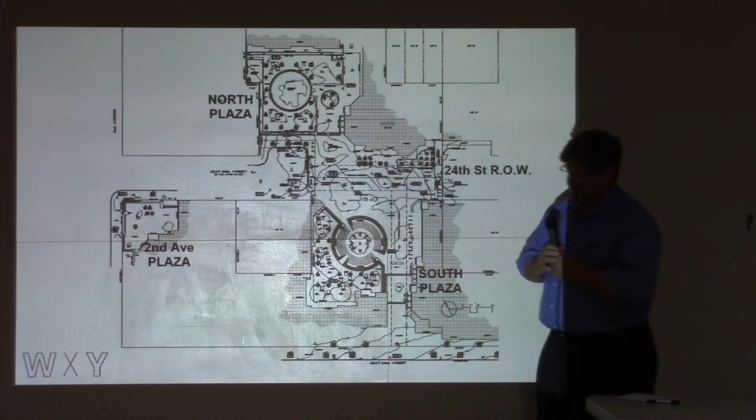Obviously at the corner of 24th and 2nd Avenue. Next slide.

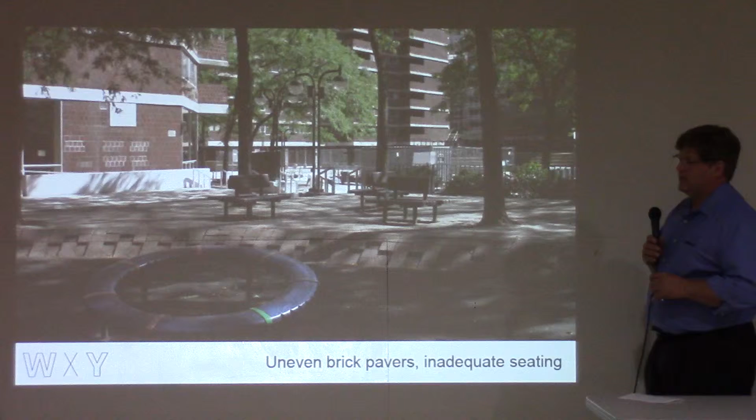In looking at the existing conditions as landscape and urban designers, we look for a bunch of cues as to what is working well and what is not working well. The trees in this North Plaza are doing quite well, especially compared to some of the other trees in the plaza, parts of the complex. So they became a primary feature that wanted to be preserved, enhanced, and developed.

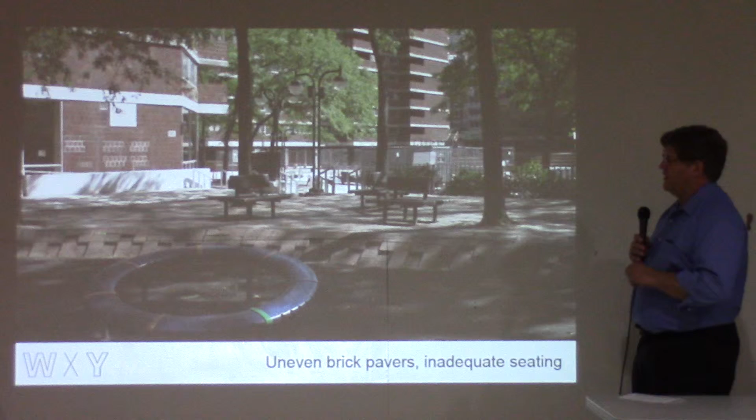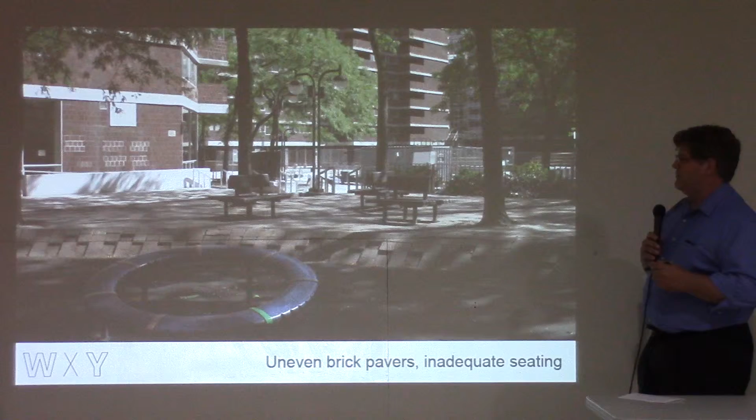But the pavement around these trees is in constant battle with the roots of the trees, creating problems for the trees, obviously, but also problems for residents as they try to make their way through the area without falling on an uneven surface. We also noted that the original benches that were placed in this area, and this was also mentioned in the surveys, are not oriented in a sort of friendly, collective way. They're just seats, but they face opposite each other. It's a sort of strange arrangement. So we wanted to work on that.

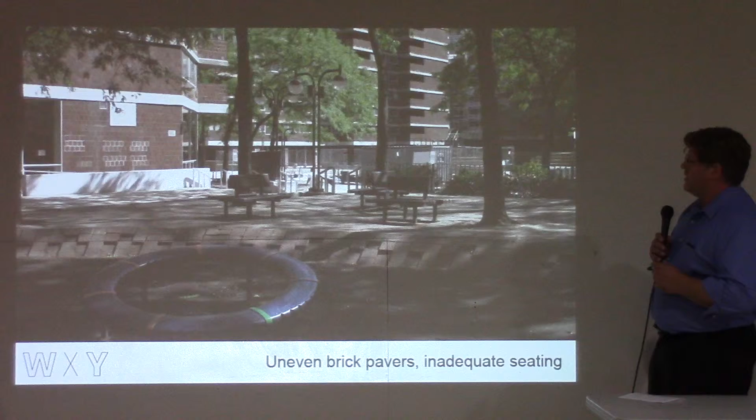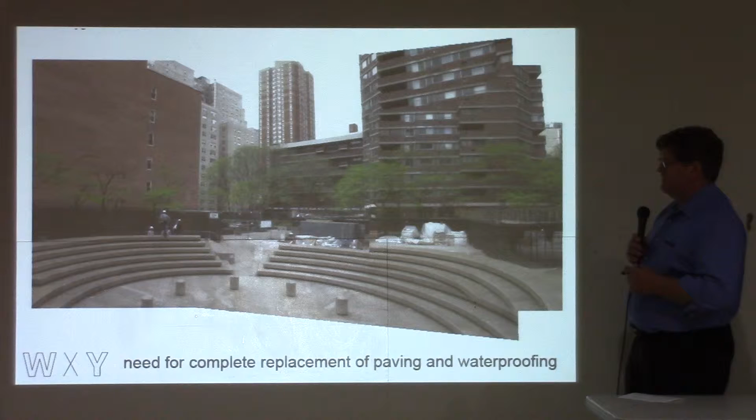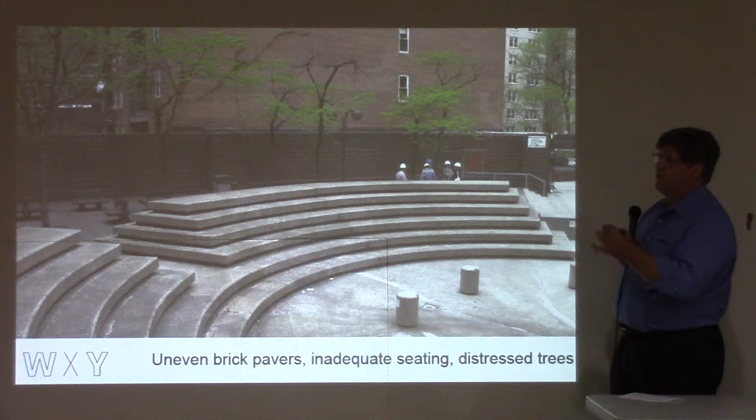The other issue with the South Plaza is the trees, which were planted at the same time as the trees in the North Plaza, and they're like bonsai trees by comparison. And they are not in good health. They need to be removed anyway in order to do the waterproofing portion of the project, because you have to get underneath them. But we took note of what the problem is with putting trees on top of the garage. It's essentially a roof, this plaza, so it's a green roof.

If you put green features on that, there's a lot more available in the marketplace now than there was in the 70s for green roof strategies with lightweight soil media and drainage layers that allow you to control the overflow of water when there's more water than the planter can handle. And there's also a lot more known about what's the right kind of plant to put on a roof structure.

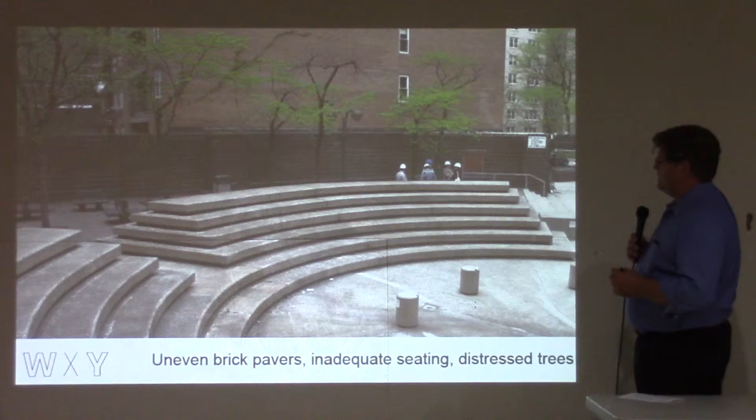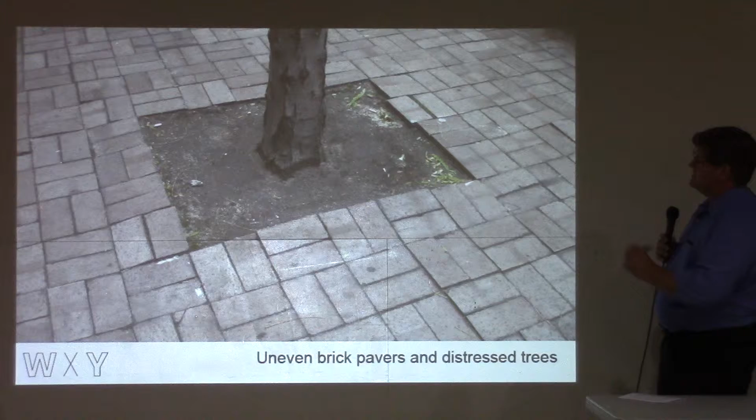So next slide, please. And this is just a close-up of the sort of ongoing battle between walking surface and tree. All of this unevenness here is created by the surface roots of the honey locust tree. This is just another slide demonstrating how dark and kind of foreboding this back area is, even during the daytime.

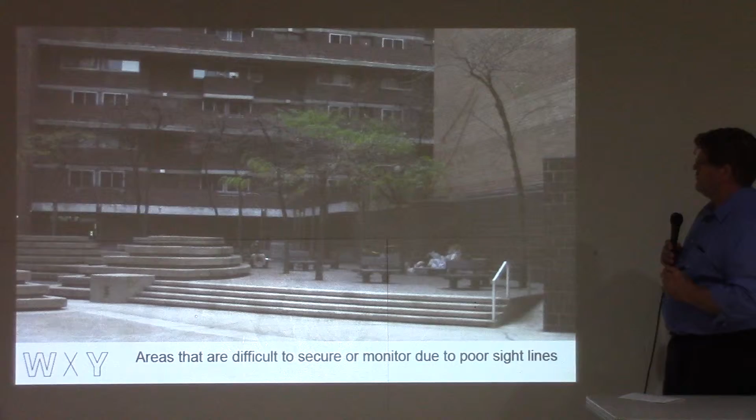Next. So out of this process of looking with our fresh eyes at what you all have been living with for years, and reading through the surveys, we came up with 12 goals of the redesign. And this is all pretty straightforward stuff, but it's good to state it, and we always are looking back at it and making sure that we're accomplishing what we set out.

So replace the paving to eliminate trip hazards, but also reduce paving and increase planted areas as appropriate. One really good way to handle stormwater now is to actually use some of the planted areas to collect stormwater, reducing the amount that you contribute to the combined sewers.

3, provide a new landscaping treatment for all plazas with plants carefully selected for areas of full sun to partial shade as required by each location. Right now, you basically have trees and a few shrubs and whatever people plant on an annual basis. Our goal is to come up with a landscape that is year-round and survives through all the seasons. Doesn't require replanting each year. Next slide.

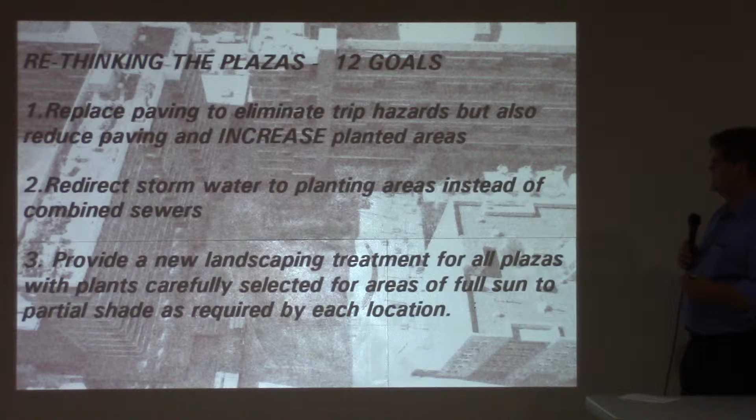Create, as I mentioned before, landscape areas that are compatible with the garage roof waterproofing. 5, create a garden that continually changes in appearance with seasons, so that there is an ongoing interest and variability in the visual display. 6, select plants known for their resistance to drought and disease, resulting in gardens that are easier to maintain without need for extensive and wasteful irrigation systems or fertilizers or pesticides. This is a big part of our design. Judith will talk more specifically about how you do that in a moment.

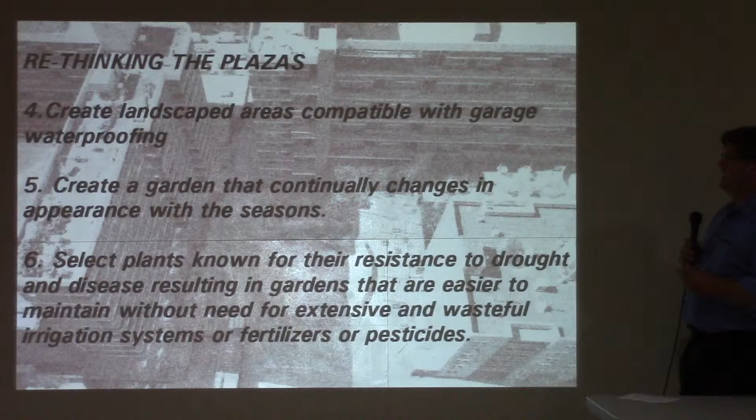Next, the gardens can also provide a positive habitat for beneficial fauna like butterflies and songbirds, providing nectar for butterflies, seeds for birds, so that it will become a living landscape, not just a display of plants.

Create landscapes that can have an educational impact and also be aesthetically enjoyable. The planting plans are being organized in such a way that we'll be able to identify what plants are planted in certain areas that create both an aesthetic effect, but also a way of understanding what you're looking at.

Nine, make all plazas universally accessible by installing fully current ADA compliant stairs and ramps, and all hardscape pavement will be cast in place concrete, no pavers, no more uneven surfaces caused by small unit pavement.

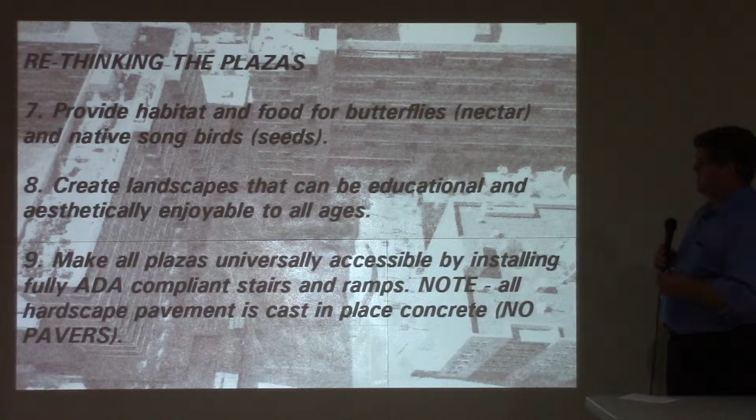A very important thing that was not our idea, it was a task assigned to us, is to specify all materials and fixtures with consideration to cost, value, durability, and ease of maintenance. I think we've accomplished that. Some of the samples are over here. We can talk about those later.

A very key feature of the new design is an attempt to improve security, eliminating those dark and hidden areas, creating more fenced-off areas that will provide greater control of access to areas at times as determined by the community. And the other opportunity, which we'll get into in a minute, was to expand the playground, provide additional equipment suitable for a wider range of ages, from toddler to 15 years old.

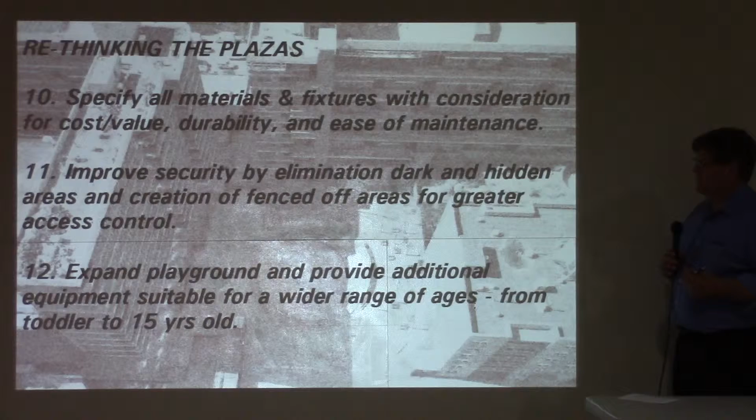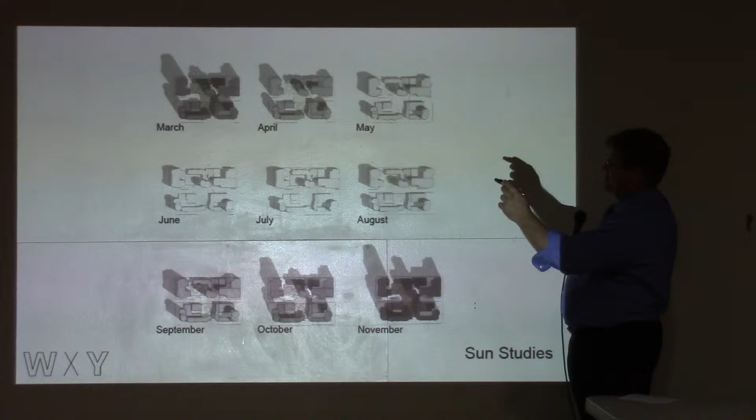So one other aspect of our study of the plaza was to do a sun angle study for the entire year. We ran animation, which actually was every day of the entire year. This is just a monthly summary of, I'm guessing it's around 10 o'clock in the morning or something like that, I can't remember. But in any case, this is a snapshot, like March 15th, 10 o'clock in the morning, April 15th, 10 o'clock in the morning, May, and so on.

And what we were trying to get out of this is, what are the differences between the plazas in terms of the amount of sunlight over the course of the whole year? This would affect our choice of plants, it affects our choice of programming, what goes where, what will be suitable in certain areas over others.

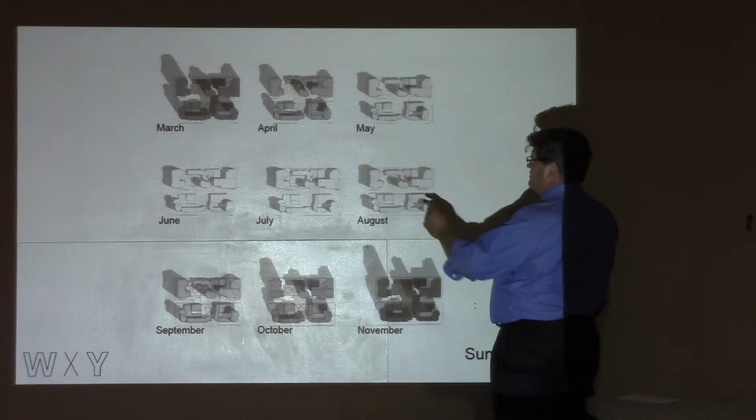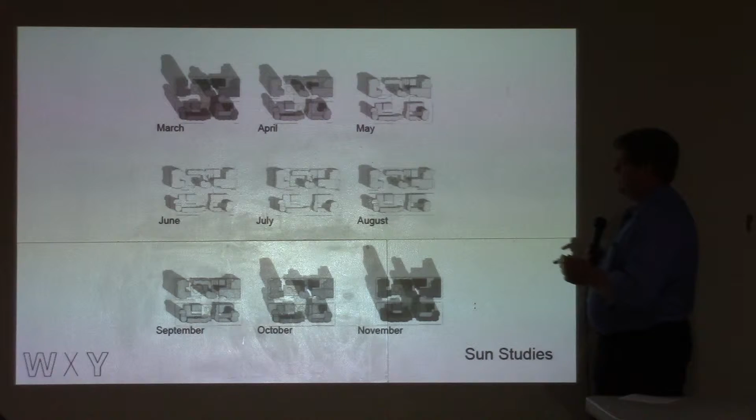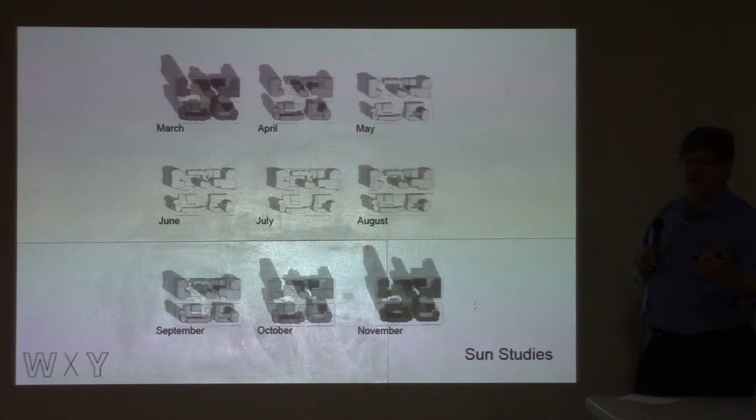What we found was that for much of the growing season, the North Plaza had full sun, and that's part of the reason why these trees have done well. The South Plaza is shaded from the south and the west by these tall buildings, and that is also probably contributing to the lack of growth of those trees over there. So they're not getting enough soil, enough water, or enough sun. And so this became an important first step for us to understand how we set up our rethinking of the plazas.

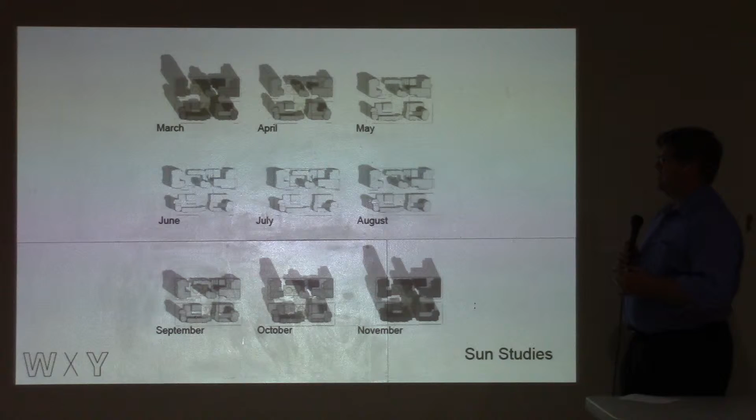So this is a plan of the new design, and the big decision that came out of the 12 goals and the sun studies and the plant health that has been observed, was that the right place to build a new garden for East Midtown Plaza was in the North Plaza for a couple of reasons. One, the sun. Two, it's on grade, it's on soil, it's not on a structure. And three, by making it a garden, we can remove probably about 75% of the pavement that is competing with the trees for air and water. So it's a win-win-win for those three aspects.

This is a honey locust tree, which has a very nice dappled sunlight effect, provides nice cooling shade, but it's not dark. And you've got a really great feature here in these existing trees. So we've done everything we can to ensure that they continue to do well.

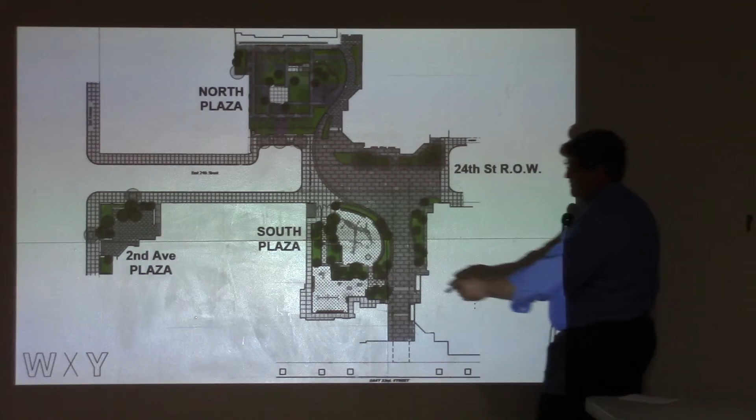In the South Plaza, there's the challenge of dealing with a landscape plan that's appropriate on top of that structure, both from a waterproofing standpoint, but also weight, and also dealing with the sun being cut off most of the afternoon by shading from these buildings. So we determined that the right place to have the playground was the South Plaza. We can talk more about that when we zoom in on it.

The Second Avenue Plaza has been slightly reconfigured to make it a more flexible space that can be somewhat more secure than what it is now. The corner stairs have been replaced with planters. Planters are being designed so that there is no seat wall along the public sidewalk side to discourage a lot of collection of people sitting in that area.

Right now, it's a bunch of walls and steps that are all conducive to people just sitting down and hanging out. What we're trying to do is to create a nice planted shady area that feels very much part of the East Midtown Plaza complex, not just the sidewalk leading into your property.

The 24th Street right-of-way: what we wanted to do with this area is create a continuation of the design concepts and the others, so we developed this curvilinear shape in the paving pattern that is reflected in the planters of both gardens. We feel like this ties across this street closure, which, while the street closure is a very, very important part of the development of the complex all along, it has always felt like a line drawn in the sand between the two sides. So we want to draw a line across that street and really make it evident that these go together.

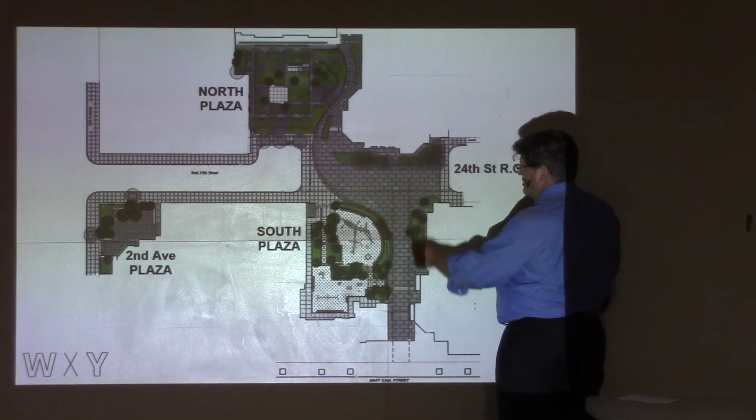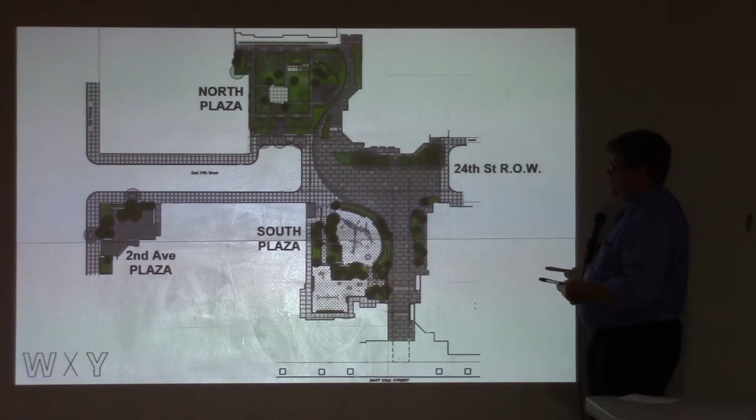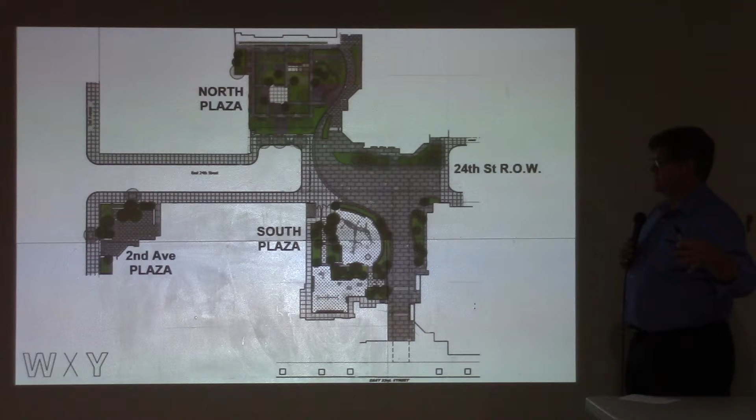The ramps, for the most part, in the existing changes in elevation are all being updated to current standards with handrails, and the slopes are all being confirmed for compliance. Within these plazas, there are some slight level changes. There's a new ramp being installed here to deal with this level change. In this area, which we'll see in a minute, there's two levels. It's not always apparent because most people probably don't go in the back. The back part is higher. That needs to be maintained because that's a structural change in elevation, and we're dealing with the ramps there.

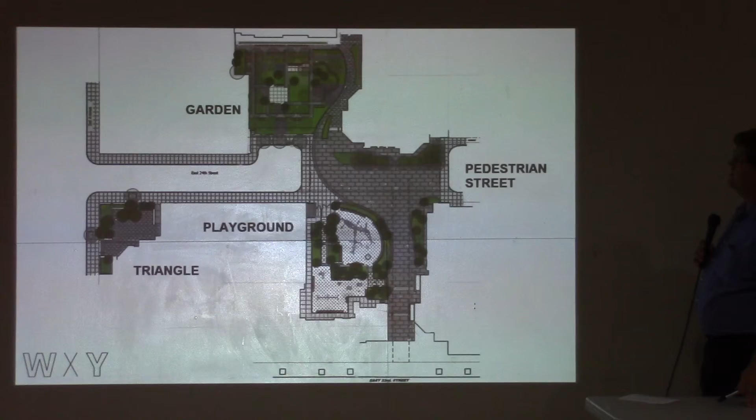Next slide. So just to reinforce the point, there's the garden, our pedestrian street, the playground, and what is sometimes called the triangle. So we're going to zoom in on each now, just a little bit more closely. We'll have 3 slides of each. It starts with the setting out plan and the paving plan.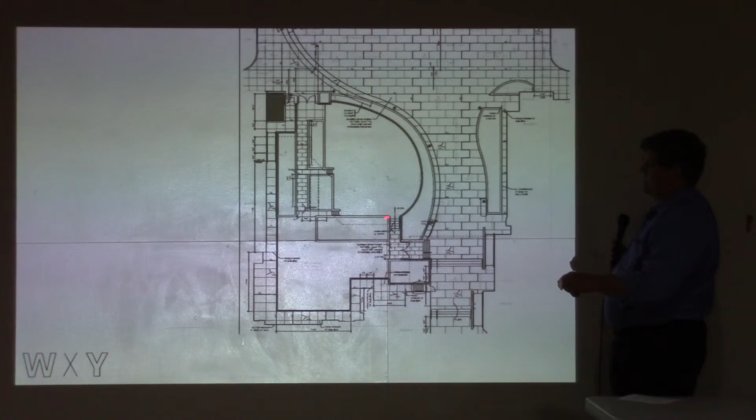This change in level is also being used to create two zones within the playground, and they're going to separate age groups. The toddler age, 2 to 5-year-old play equipment and swing set is in this area, looking out over the area with the play equipment for 5 to 15. The planter here creates a low screen from the public area, and there's a fence at the top; we'll show you a photograph of what that will look like in a moment. Seating is also along here, which you'll see in the next slide.

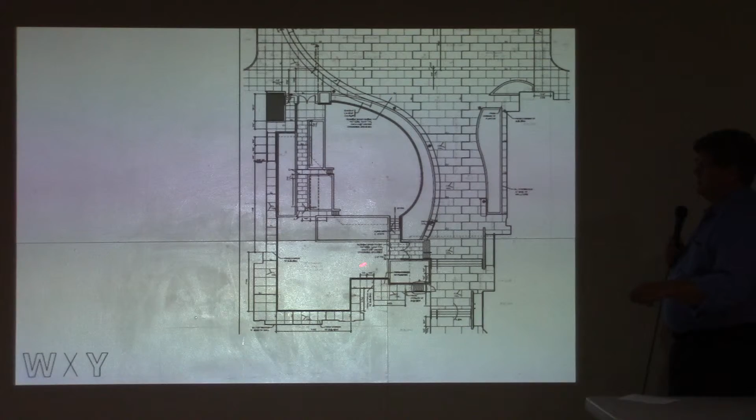This is a below planter. It is elevated above grade; it's not flush with the grade. We talked about that a moment ago. These planters are designed for appropriate depths, trying to keep sight lines clear through here so that parents can monitor, multi-age families can be monitored. With a small child from here, they can still see what's going on here, and also the security from out here looking all the way back through here.

Next slide. Here's a different rendering of the same plan showing the playground equipment and the pattern of plants, which we'll go into later. Plants are being arranged in such a way to create colorful graphics that will be as interesting up close as from an apartment in a tower. You can see here the play equipment we've drawn in with all the safety clearances called for by the manufacturer. These are made by the same company that makes the equipment that's out here, Kompan.

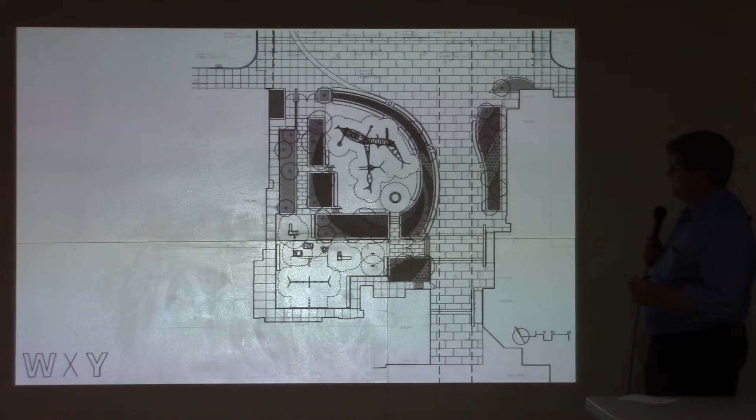Next slide. And this is just a colored version of the same thing. One thing to note is that we are using several different kinds of concrete, decorative aggregate concrete in the plazas to distinguish the private property from standard Department of Transportation sidewalk, which in this rendering is represented here. This is the sidewalk along 24th Street.

This big S that we were describing is going to be represented by a concrete with some silicon carbide cast into it, so it has a slightly sparkly appearance to it, very smooth. And that will become the dividing line, in a sense, the new graphic representation of now you're on the East Midtown Plaza. The main plaza area is going to be a pigmented gray concrete with 3 different colored broadcast stone

in it that then gets exposed by washing off the top layer of the cement all during the casting process. This will create almost a garden path feel to a large concrete area. It's much more interesting than plain broom-swept concrete. And the last piece here, which doesn't look anything like this, it's over there, you'll see it's much more colorful, is just an accent concrete that will be used in special areas, both in the playground and in the garden.

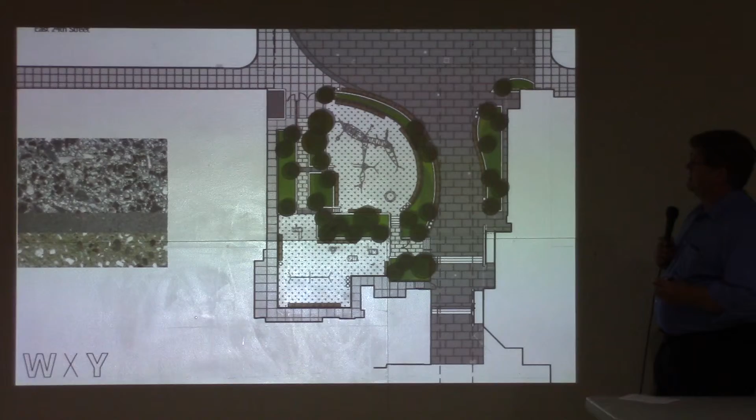All the steps are being constructed out of solid granite. There's a sample of a granite tread right here for durability and long-lasting ease of maintenance. I think that's it for this. Sorry, one last thing. This speckly stuff here is representing the play safety surface, which is a recycled rubber tile. We have samples of that there too, and they're designed for the appropriate fall risk of the equipment that they're

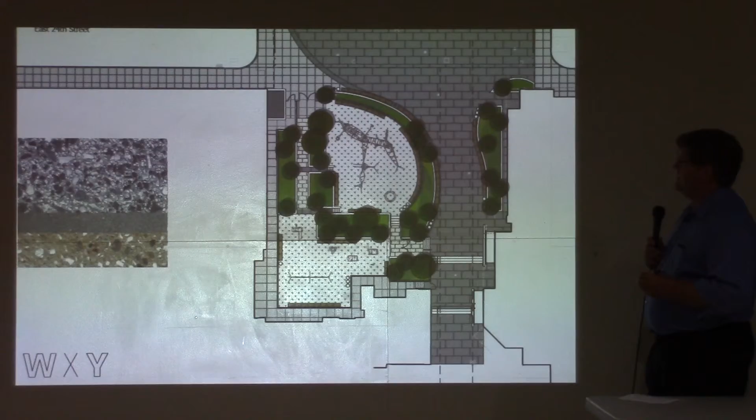beneath. Next. And here's a rendering of this South Plaza looking up towards the North Plaza. So this right here is 24th Street right-of-way. This is the pedestrian right-of-way from 23rd. This is the planter outside the management offices, and you see there's a low wall. And we're also rimming that wall on both sides with some seating and waste cans and light poles.

And here, this is the planter that I was referring to as creating some separation between the very public thoroughfare and the more semi-private play area. You can see the fence surrounding this, and there's a gate right here. The fence comes around this way.

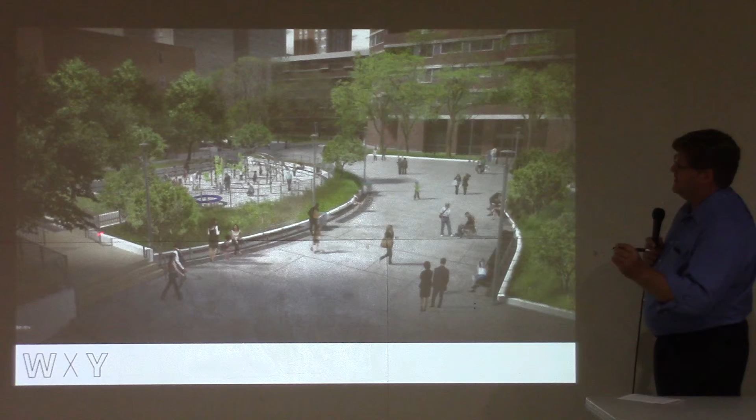There's sort of a room in the middle of the garden with a larger area of concrete to stop and reflect. And then there's a curvilinear asphalt gravel path through here for a sort of more natural walk. This is all laid out in such a way to allow for a loop. So if you want to just have some light exercise, it's not a running path or anything like that. But it's all on one level and can be traversed, or you can sit at various points along the way.

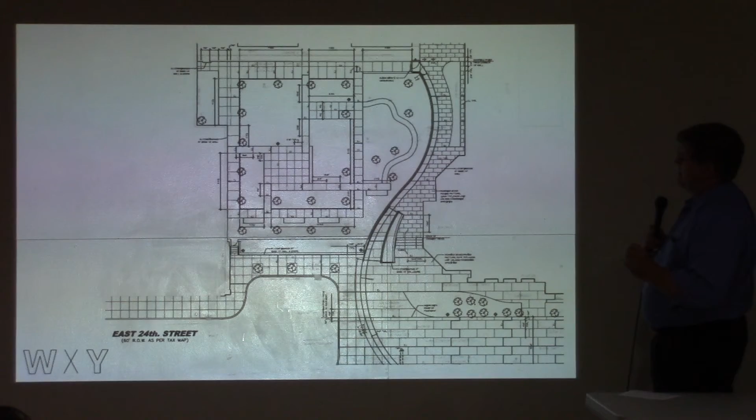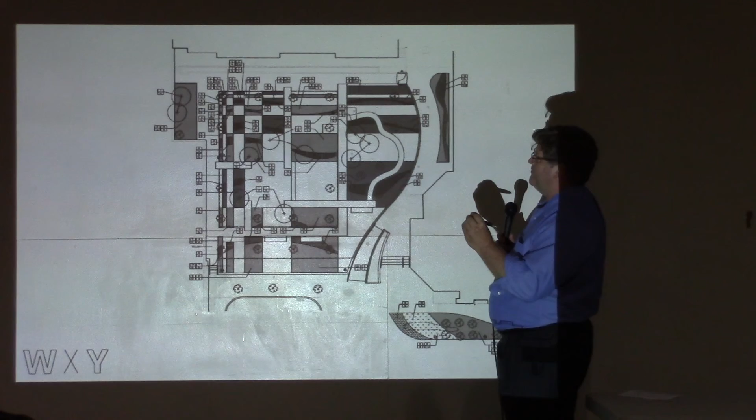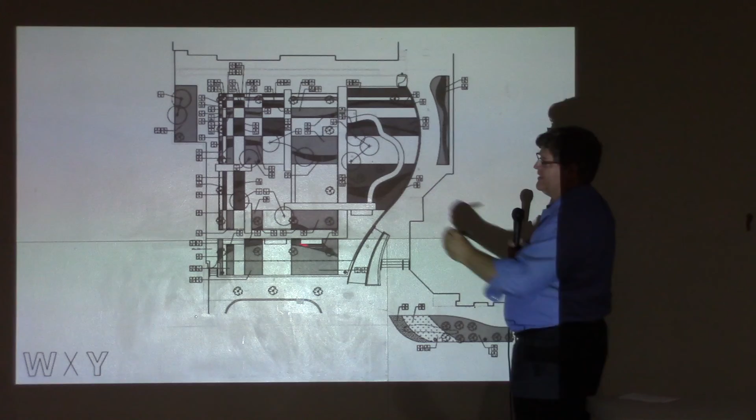I was wrong last night about describing it, so I've been corrected now. This is a graphic representation of the Fibonacci series, which is just a number series where you take 0, 1, and then the next number is the sum of the previous two numbers. So 0 plus 1 is 1 again, and then you move up, and 1 plus 1 is 2, 2 plus 1 is 3, and so it creates this geometric progression of increasing size. So the widths of these in both directions are following that Fibonacci series. It's just a little bit of fun. It doesn't help the plants or anything.

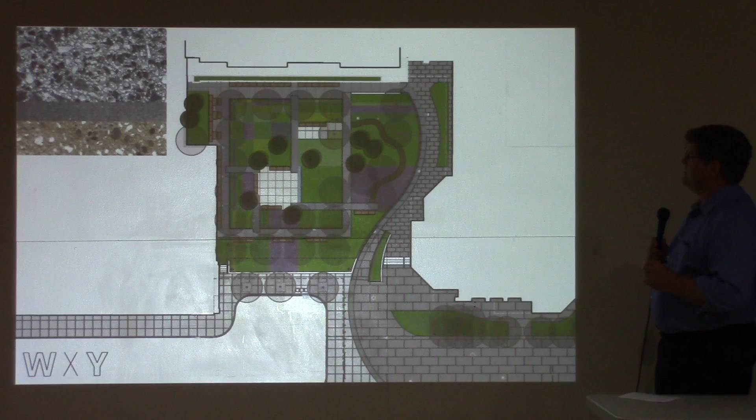And here's a rendered plan of the area, so you can see the different kinds of materials again, and also the scoring pattern. All these lines on here will be saw-cut joints, so it'll be a very smooth surface, and the joints are sawn in to look like pavers, but they're really just providing crack